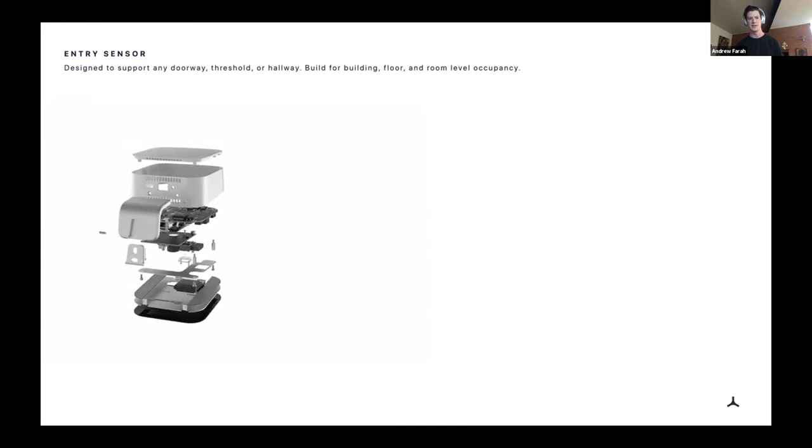Now, the way that this is happening is essentially through an entry-based sensor. So we build 2 sensors, which we believe are the fundamental building blocks for measuring how a building gets used. This one device on the left, it's about this big, gets mounted above a point of entry, kind of like a nicely designed shower head. And my head of marketing hates when I call it a nicely designed shower head. But we bounce infrared laser light off of objects as they walk through a doorway.

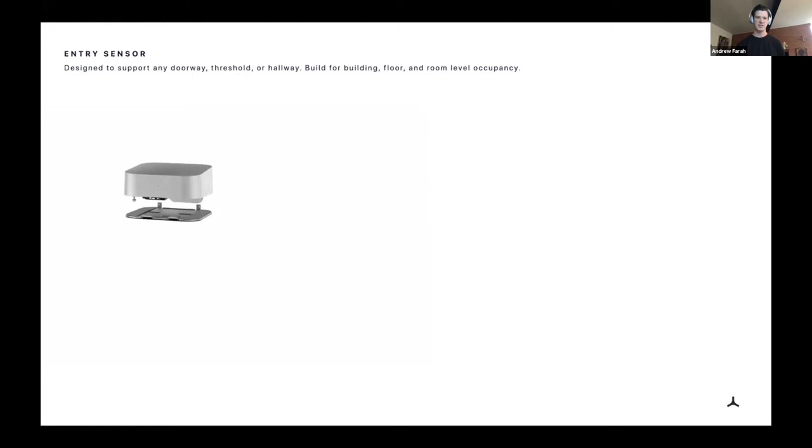And a common theme in, I think, any sort of analytic system, especially when it comes to sensors, is that people will say, well, it's a vision sensor. It's a computer vision sensor. We use complex machine learning to figure out utilization. We like to just say, just show me what the sensor sees.

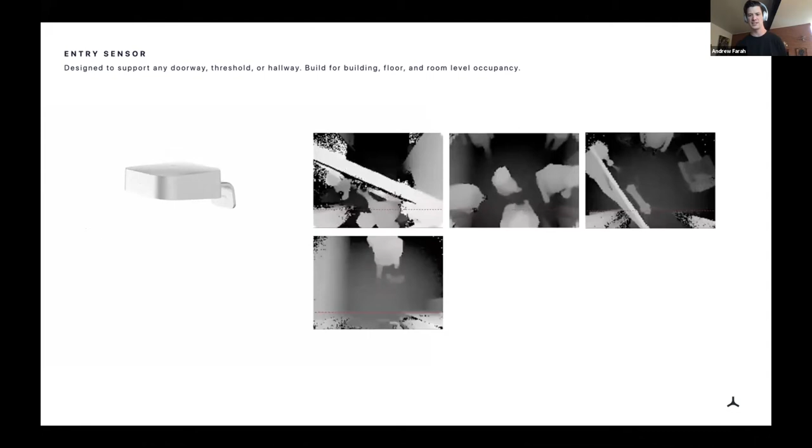So I thought I would show you what the sensor sees. The one thing that we've learned over the last, I don't know, 6-7 years of trying to build an occupancy-based system, a real-time occupancy measurement system that doesn't invade privacy, is that humans are extraordinarily weird. People just do strange stuff in doorways. They do strange stuff in space.

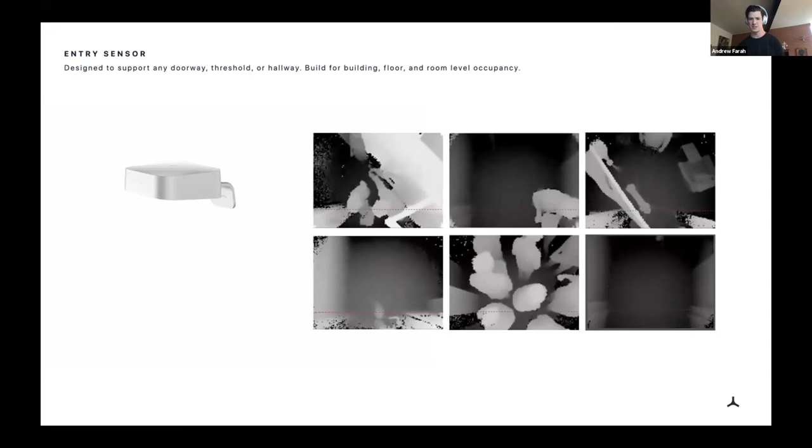And so what you can see here is actually what our devices see. This is infrared laser light bounced off of objects as they're moving beneath the point of entry. And what this allows us to do is essentially make sense of complex human behavior. You can see a television in the top right. You can see a trash can in the bottom right.

Humans moving in different directions, people taking phone calls, bumping into each other, bringing plates, the door frames themselves. And then even in the bottom left, you can see a dog. Density doesn't count dogs. It actively ignores dogs. But it's the type of thing that can create a lot of false positives.

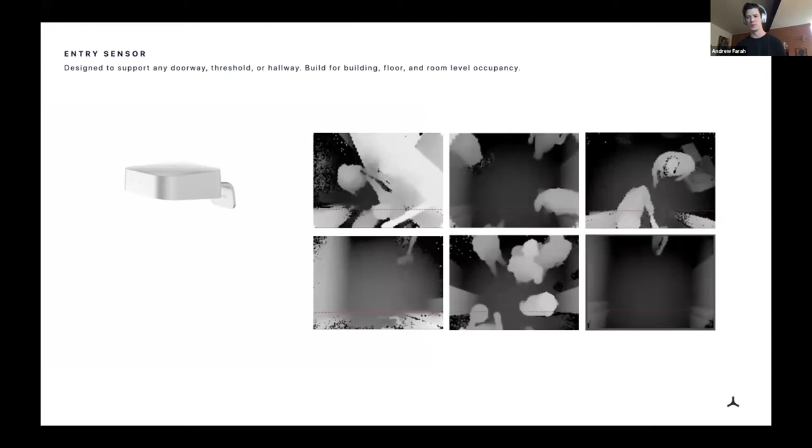So a lot of promises in space utilization, a lot of promises in accurate count for many systems out there. But doing this right requires some really remarkable precision and getting rid of all the things that are non-human in the scene. The last thing I'll note, and then I'll move on to our open area sensor, is that most buildings, when there's a reasonable expectation of privacy, we believe it's really important to build anonymous at source technology. So what you're looking at is not anonymized, it is anonymous at source.

Also, I have a 3-month-old who, if she starts crying, I might have to go pick her up, and I'll bring her on video so you can say hello.

So we have an open area sensor that is designed to measure any open space. And what's really remarkable about this system is that this is non-optical. It's based entirely on radar. You can see John in the top left and Carissa, and as they move into the space, they can be pictured in 3 dimensions. All of this without invading their privacy or knowing gender, age, or ethnicity.

This is the closest thing to magic that I will likely ever work on. We think that this is going to meaningfully change how people understand and test space design, and the people in it.

Okay, so I'm gonna have to go get my daughter and bring her back. Her name is Josephine, in case you're curious. We call her Jo, but I apologize. I'll be right back. This is a virtual demo day first. We've got a child joining, and I love it. This is the times right now. Looking forward to adding Josephine to the conversation. Cool. We'll be right back. Let me just go on mute real quick. I'll let this play while I'm doing that.

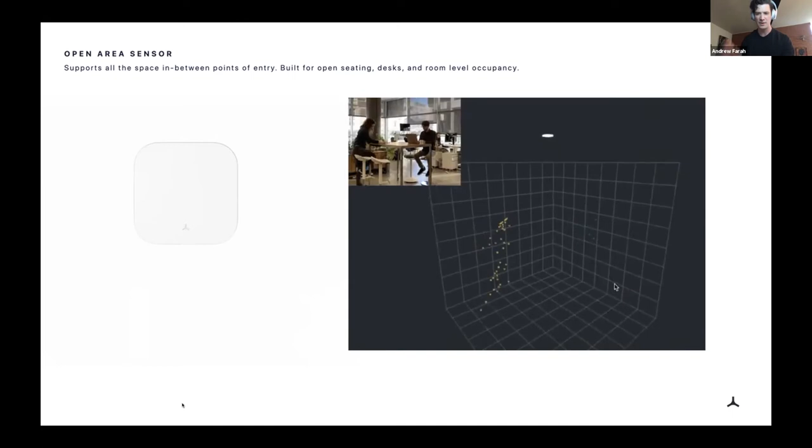Okay, this is Jo. She is truly brand new, and she has awesome pajamas on. But she just went down for a nap and isn't too pleased about it. So I'm gonna see if I can calm her down in her bouncer here while I'm talking. All right, how is the crying in the background? Is it not too bad? These are noise canceling. It's getting better. Yes, it's kind of quieting down. Okay. Yeah. All right. There's not much we can do, right? No, seriously.

So, by background, I think in workplace, something that we didn't really realize is that there is just an enormous amount of unused space. In the U.S. alone, there's about $1 trillion of space that has nobody in it. And we think that that's a problem that's eminently solvable.

There's a question about, oh goodness. I'm so sorry. Let me see if I can quiet her down in her sleep. Just one second. Hey folks, we're gonna give Andrew a second to get little Josephine squared away. So thanks for hanging tight with us.

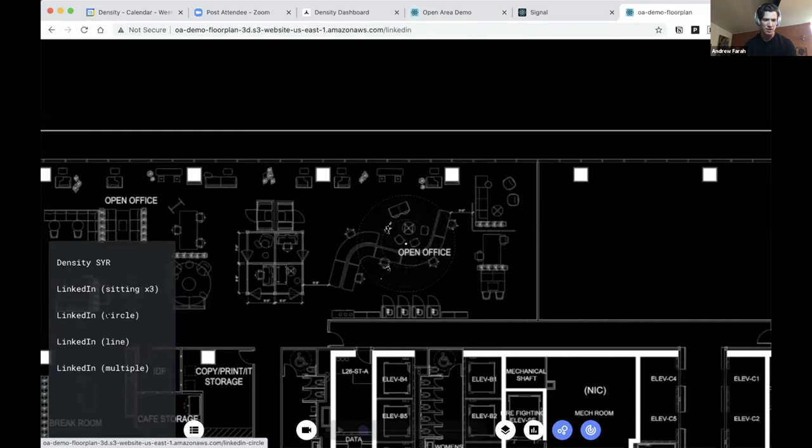So while that's loading, what you're gonna see is essentially open area measurement on top of a floor plan. This is an actual floor plan. And what's really cool is I can move around this space, and I can zoom in, but that is an actual human wandering around an actual space on a floor plan. And what's remarkable is that not only can we do this in motion, we can also do this in 3 dimensions.

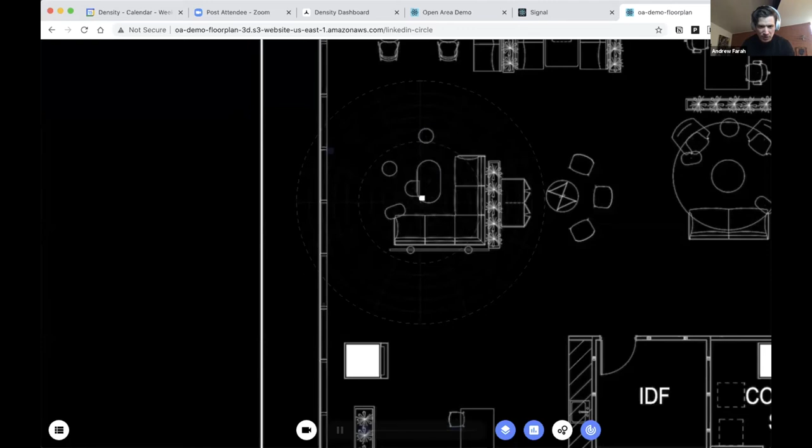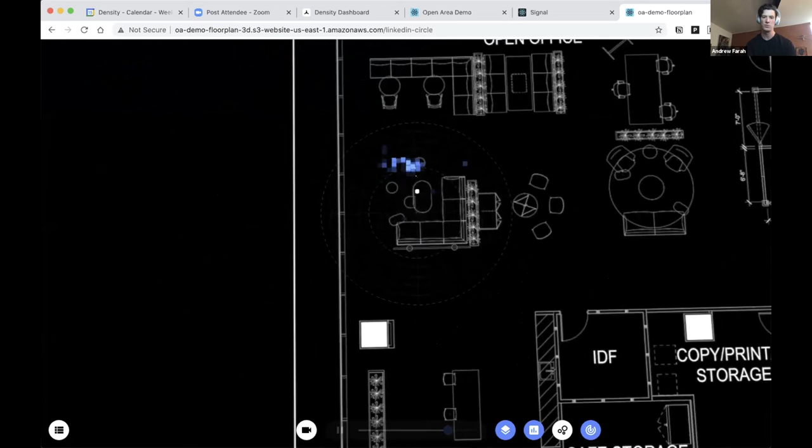So let me pull this back. And if you play Minecraft, this is awesome. This is Minecraft. This is like the coolest thing I've ever seen. And it's just never been possible before, to be able to see people in space in a way that is not just numbers and stats. And it's also totally anonymous. I've got no idea who this person is, but I can understand that this person is wandering through a space.

And so when we think about scaling this, we're able to do some very large scale deployments without having a complex installation and setup process. So this is the actual method of installing and doing setup and calibration with our devices. And what's really cool is if I toss some people in here, you can see folks as they use space. So this is helpful to simplify the process of visualizing and seeing how people will use the space that you have.

But the thing that I love about this is that as you get more substantial coverage, we can start to see overlapping fields of view. And our devices can see with a remarkable distance. So the higher up these things get installed, the wider the fields of view, the broader the measurement. And so you don't necessarily need to overlap quite as much. So this is how we do planning and deployment. We could take thousands of sensors and outline your entire portfolio in a single day.

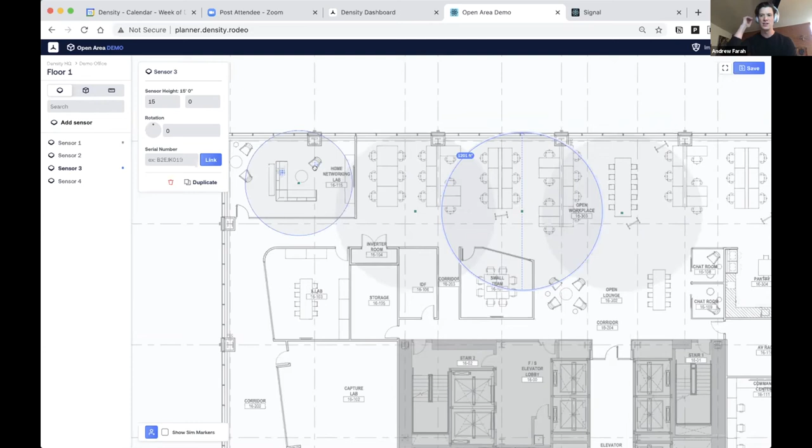But we thought, well, if you could visually measure people in space, why not A/B test actual assets? So we're going to create a room. And then inside that room, we want to add maybe 2 desks. These standing desks.

Joe is thankfully being super sweet right now and has fallen asleep in her bouncer. And I'll make sure that I bring her back up to say hello before the end. Michael Beckerman says best demo ever. That's definitely Joe's fault, not mine.

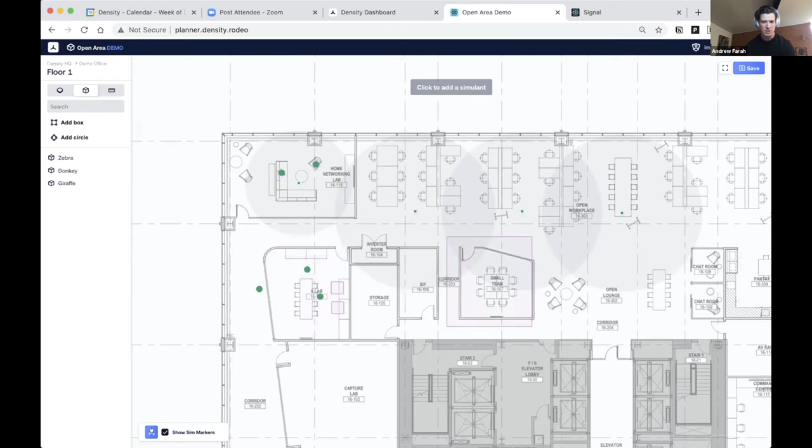I will talk about installation and power as well. So what's cool is if we toss somebody into this room, you're going to watch it go from light outlined purple to dark. Let's see. Interesting. You all might actually be seeing a bug. Let's see if this, oh, there we go. Okay. So what's cool is that you can essentially measure how an asset is performing and A/B test physical space.

So if we have somebody in this seat and somebody in this seat, you can see that these two desks are being used. And if we have nobody in this third seat over here, you can see that that space is unoccupied. Now, the coolest thing is that not only can we measure if a desk is in use in real time, is a room in use and are the desks in use, all with one sensor, we can also do dwell time.

So how long are you spending in one particular area? And we can do this without invading privacy. So again, all of this is anonymous. All this is without invading privacy. So to be conscious of time, I want to make sure that I answer some of these questions.

I don't know how to answer one of the questions: how do you get a child to stop crying so quickly? Honestly, she's the best. I'm just around as an attendee to the best kid ever.

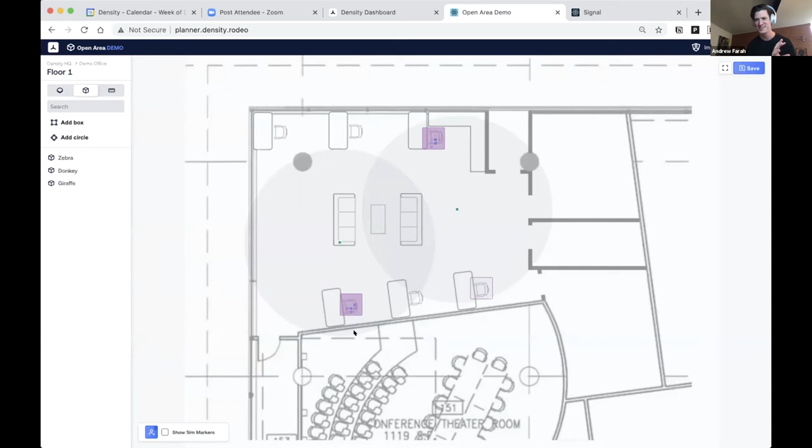Installation and power is something that we can really help you through, and we have an international network of people that can do the work.

Let me stop sharing real quick, and I'll come back to the applications in a second.

Tenant clients are planning to proactively plan their space usage going forward post-COVID, as so many companies rethink how much space they will use. How does Density help them with future occupancy planning? That's a great question. Let me share my screen again.

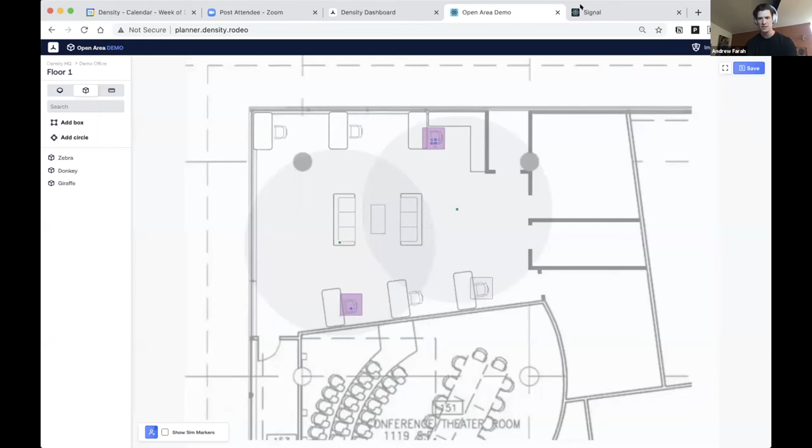This is Signal, which I want to say is unannounced. I'm showing you something that hasn't been shared with anybody but some of our closest relationships. This is a system that we built for a customer.

I'm going to get to radar for room sensing and infrared for doorways in a moment. We had a customer who said, look, we have all these beautiful analytics and dashboards where you can understand utilization at a really large scale, create reports that show visitation, total square footage, roll-up. These are all great reports and super fun.

But we had a customer who was taking data across 15 locations across 3 or 4 states, pulling it into a CSV, and then trying to plan their return to office with the data. So the way this works is they have a national rollout.

They set a maximum capacity of 40%, so no greater than 40% capacity. And what they wanted to figure out is, as they reopen offices, are they exceeding that capacity?

Badge data, just to quickly call that out: badge data is really good for one-way entry, but we tend not to badge out of buildings, nor do we badge into conference rooms or other spaces. Badge data only tells you if a person visited. It doesn't say what the occupancy over time is, or what the utilization over time is.